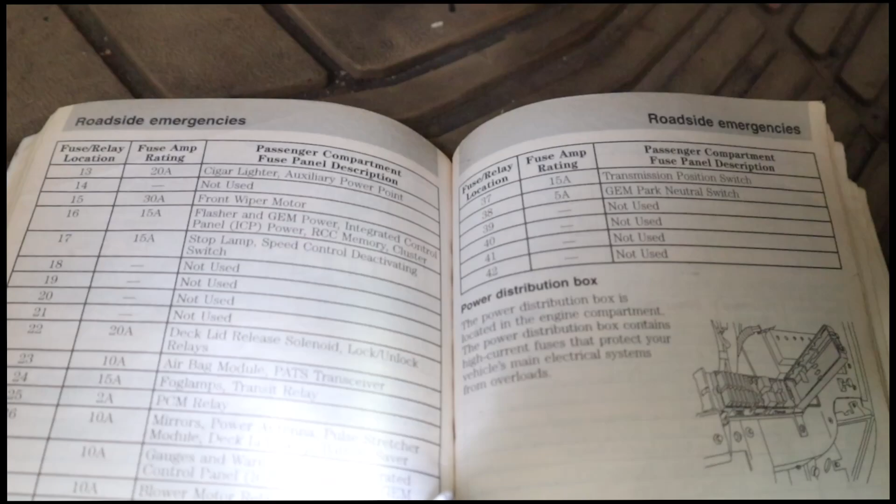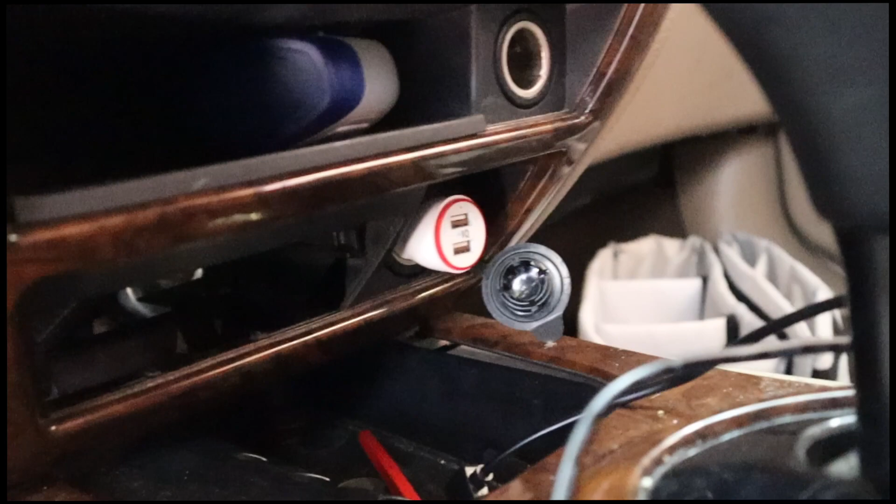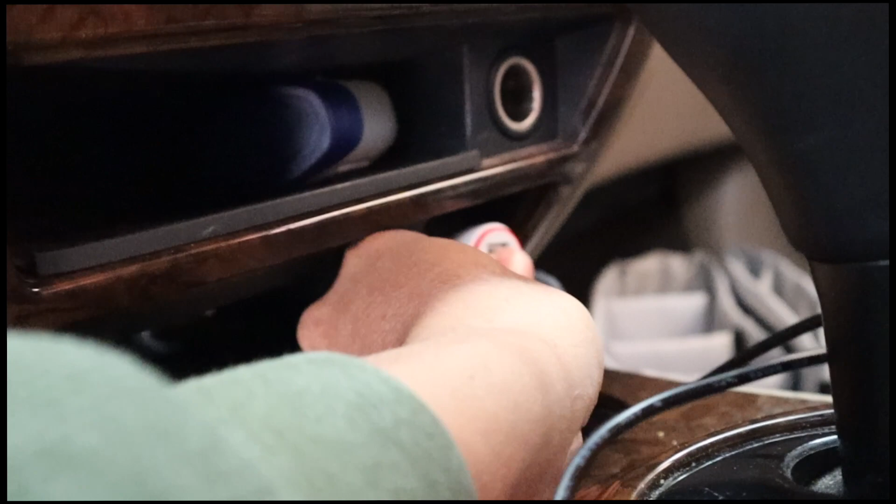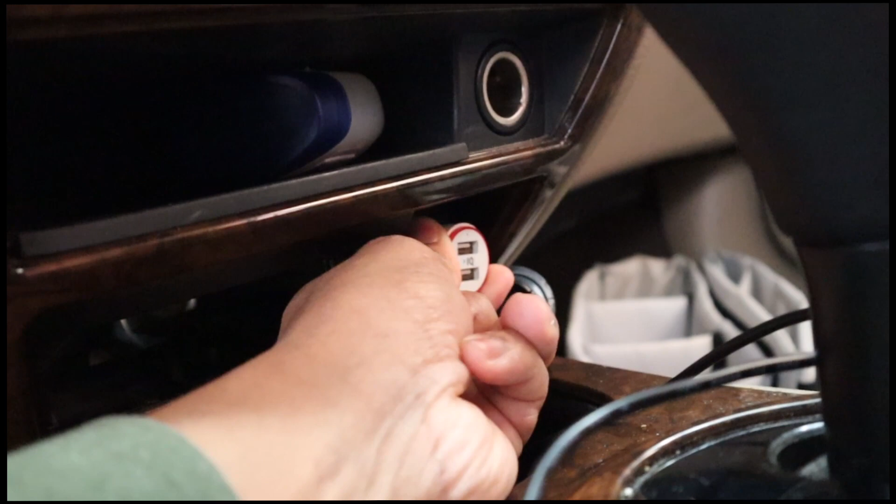Right now we have an issue with our cigar 12 volt output, and I think it blew a fuse. I was using the car pump the other day for my tire, and it just went out, so the pump stopped pumping. Right now we look like we're out of luck, so we are going to change the fuse.

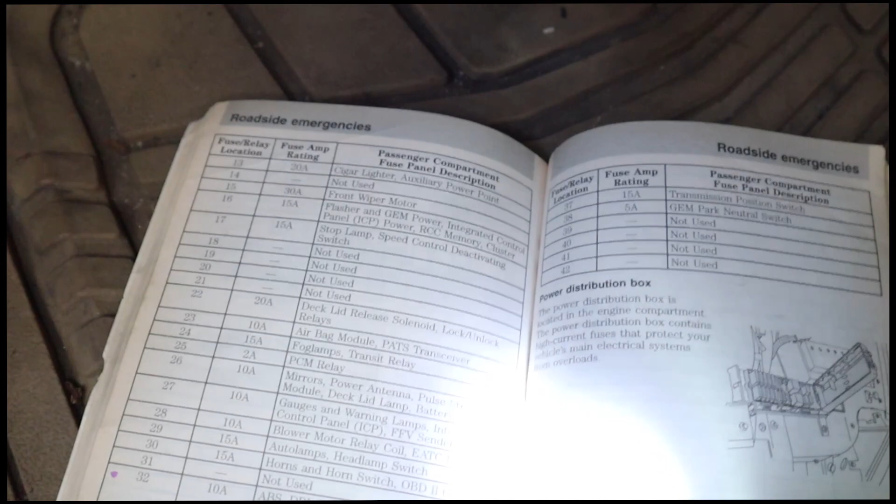Let's go ahead. I'll post this in case y'all don't have your user manual. This is for my 2000 Mercury Sable. Here we have a new fuse, and I'm going to swap it out for the old fuse.

If you come down, most of this stuff I already got rid of. There used to be a plastic cover here, I think I threw it away, didn't really need it. It's an old car, I don't think anyone else is going to buy it after me because I plan on keeping it anyway. But let me bring the light up here.

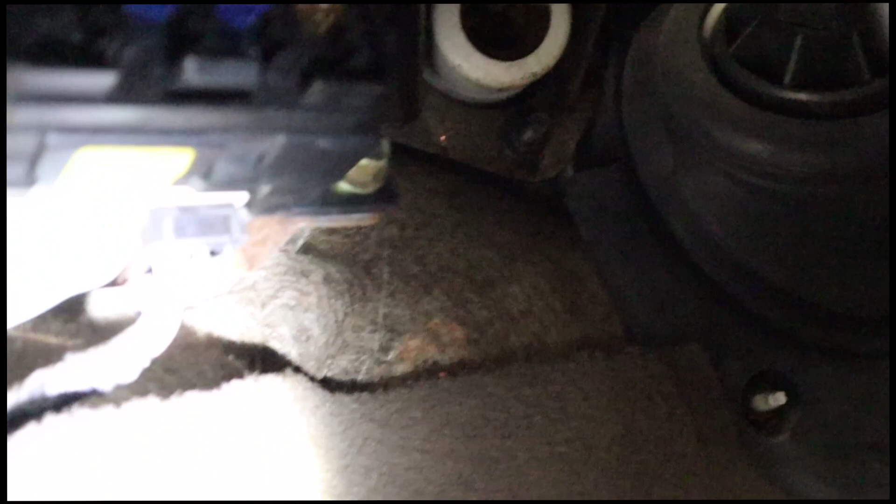If you come up here, I took the cover off a long time ago just to keep it off. I don't really need it, but beside this box right here, the fuse cover box is right there, and you usually just unclip it off from that clip right here on the bottom. Don't know if y'all can see it too well, but there's a clip right there.

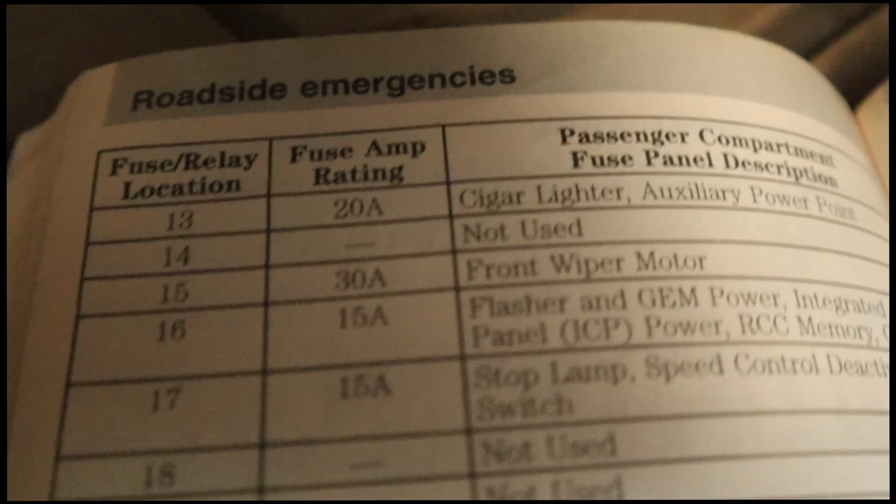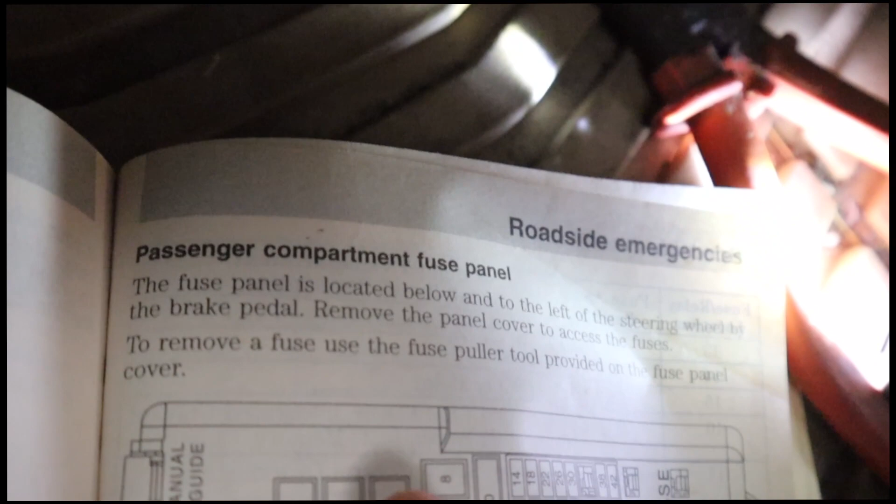Now, on here it says cigar lighter, 13, 20A. And if you flip onto the diagram, it lets you know what fuse component box it is. It says passenger compartment fuse panel. So basically it's on the driver's side, but anyway, this is the fuse compartment.

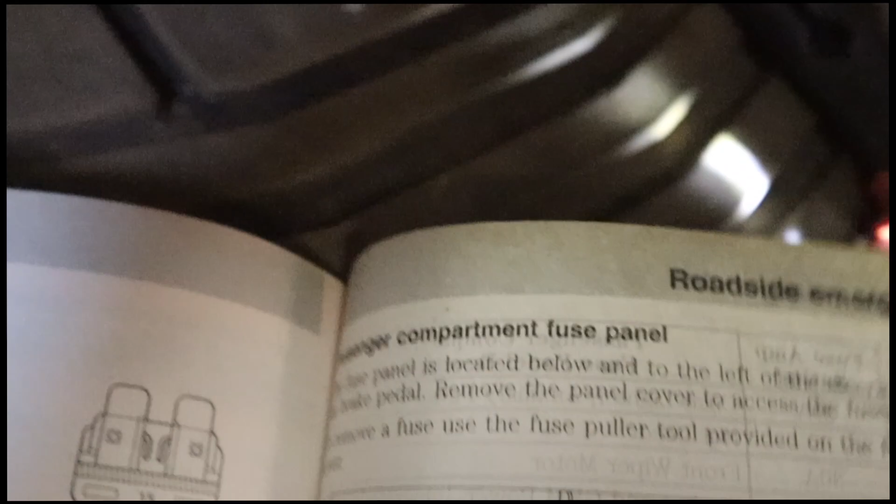So over here is 13. Hopefully y'all can see it. Am I too close? Okay, so we have 11, 12, 13. Now the way this is, it looks like this going up, and that's what that looked like right there. So our 11, 12, and 13 are the first three on the top.

So I'm going to take it off. Hopefully I can still keep y'all on camera while I do this. Let me find a good angle to put this light. That looks good right there. I can see a little bit. All right, now let me try to take that off. Grab some pliers and pull.

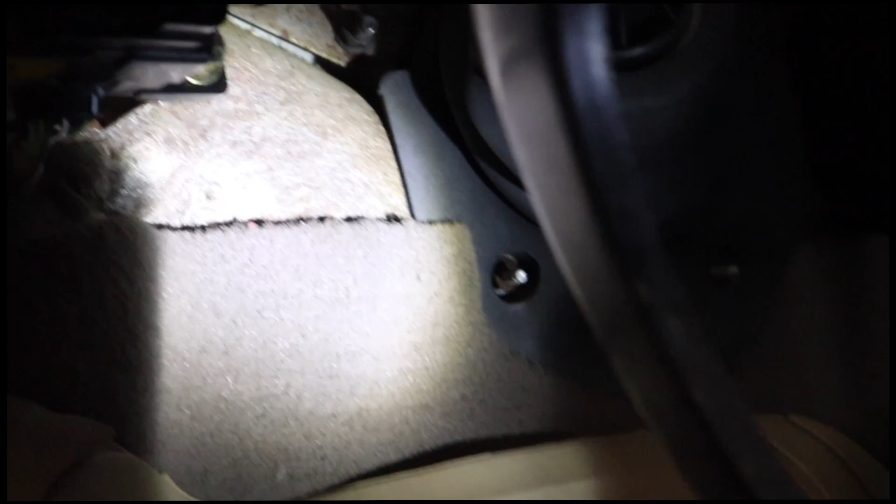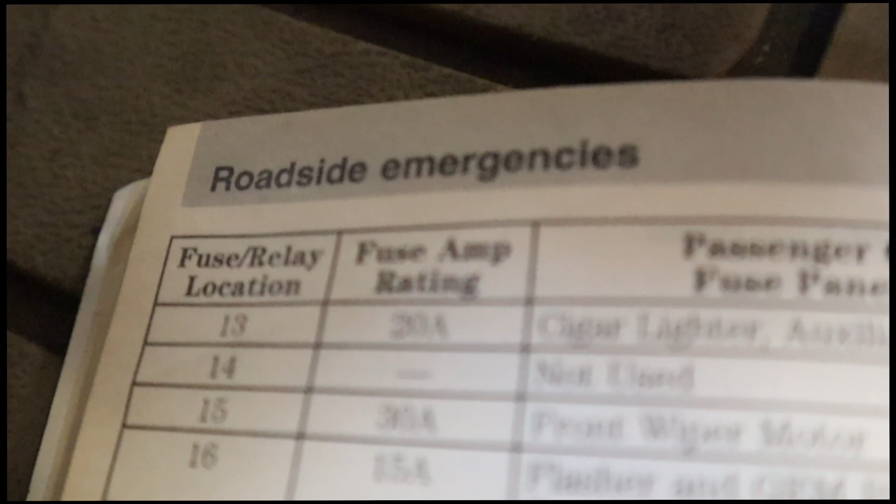Oh, there we go. And they say this is a 20A, that's what it says on here. Right here it says 20A, and we just pulled it out of location 13.

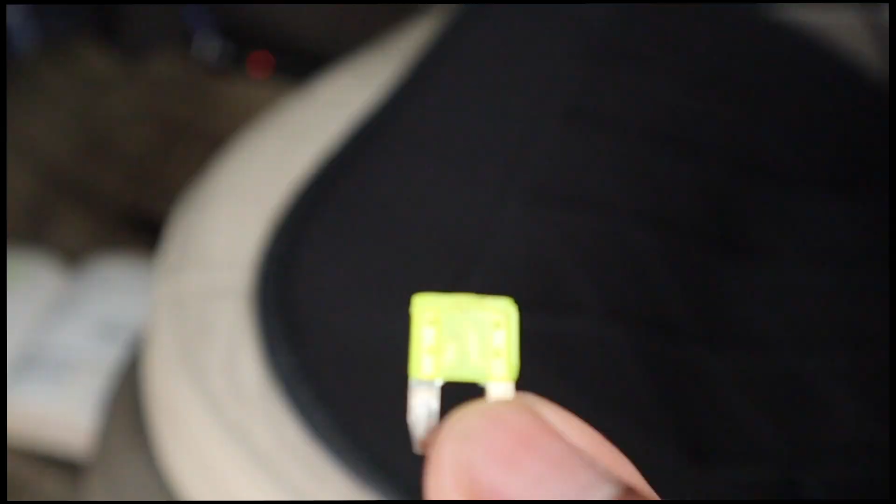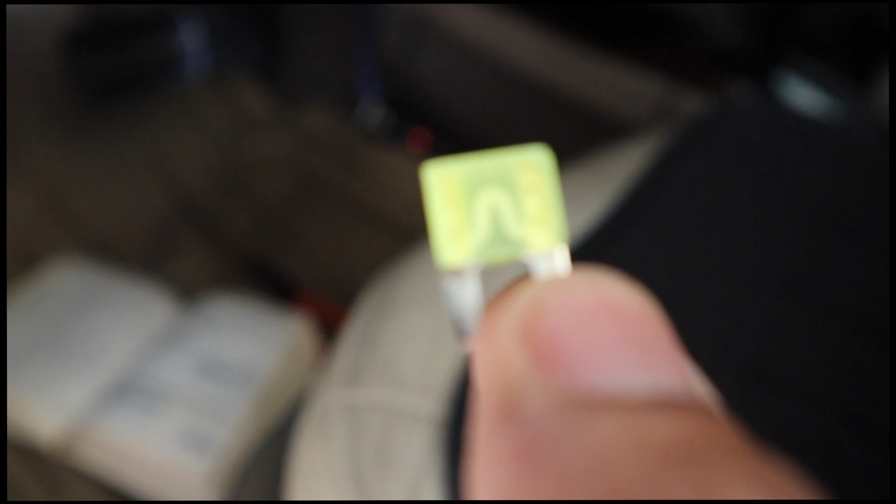Now right here I got the new one. All right, now we will look at it. Let's look, it looked like the fuse has blown from the center from what I see. And then we have the new fuse. I got another new fuse, so see, now you can see it perfectly. You see that? Right there in the middle, that little loop right there. Don't look like it's blown.

Now, as you saw, my white charger is usually supposed to have a blue light on it, and it didn't have the blue light when I had the blown fuse on there. So we're going to put the new fuse on. It's a little bit harder with the camera, you guys, I'm just trying to show y'all though. I may have to put y'all down, but y'all get the point.

Okay you guys, so I just put the new fuse in. It is in, okay. Now we'll grab our little charger right here and let's see if the blue light comes on. Yep, blue light is on, we have power here. Check the one on the bottom. Yep, that was it.

We're done. Out with the old fuse, in with the new. Mission accomplished. Now it's time to go driving.